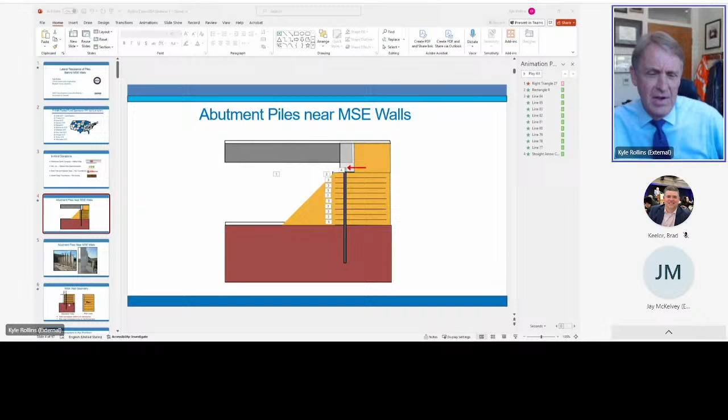Okay, Kyle, I got to cut in again. The slides are not going anywhere in our view. We're seeing the same one. We're all still on slide 4. Really?

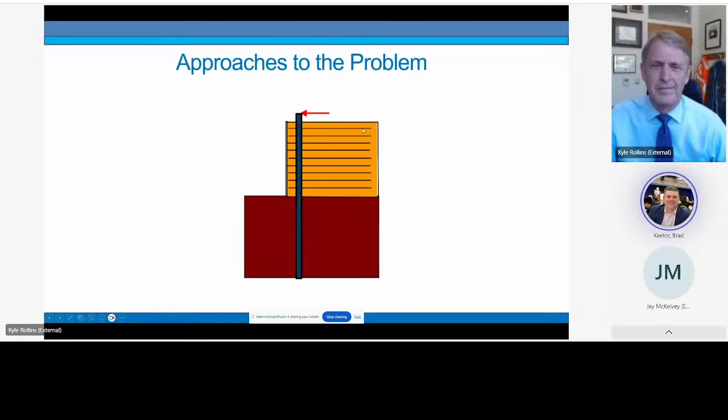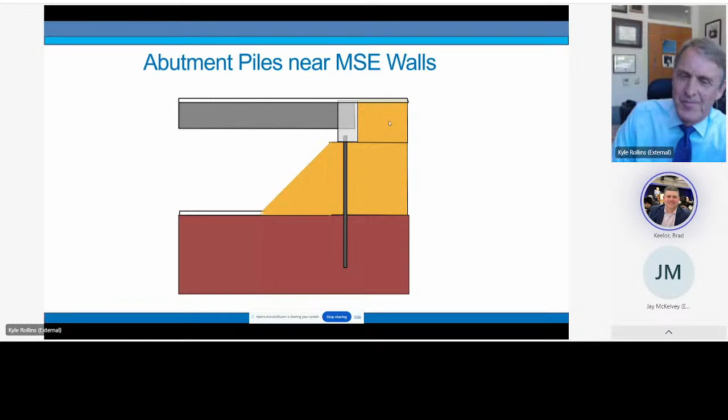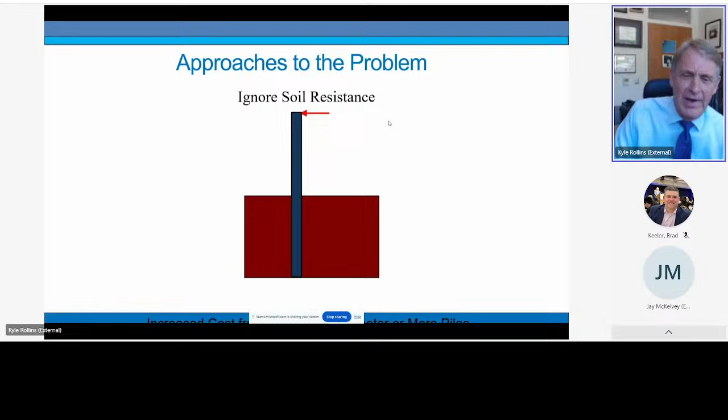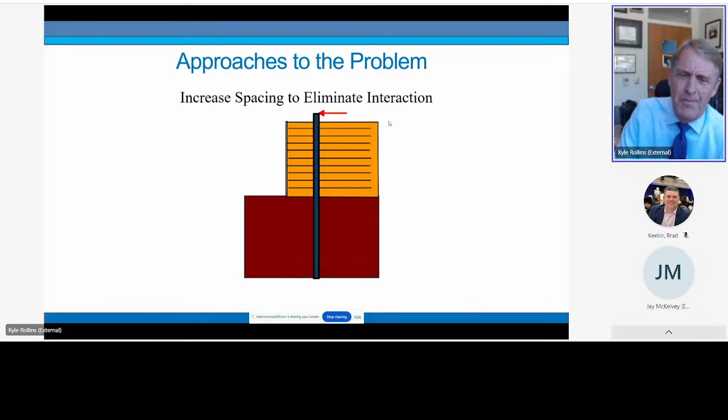So we're looking at how the wall would decrease the lateral resistance and how the pile load is going to increase force on the reinforcement. One approach is to ignore the resistance, which leads to more piles or larger diameter piles. Another approach is to move the pile further back from the wall face to reduce interaction with the wall, which leads to larger cost due to the increase in bridge span. And another approach would be to estimate a reduction factor, with the question being what should that reduction factor actually be?

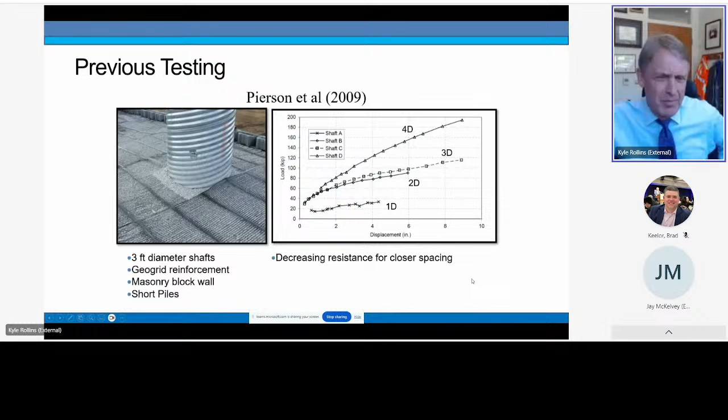That's anyone's guess, because there's been very little information to clue us in on that. Some of the best testing before we started our work was from Pierson et al., a study from University of Kansas. They involved a 3 ft diameter shaft with geogrid reinforcement, as you can see here, and a masonry block wall. The piles were short, so they had a tendency to rotate. But you can see the load versus deflection curve here, that as the spacing between the piles decreases, there's a significant decrease in the lateral resistance developed on the pile. That's going to be largely a bad thing.

If we look at the deflection from that study, we're going to be talking in our study about 3 inches of pile head deflection. That would lead, in this case, to nearly 2 inches of deflection of the wall, which probably wouldn't be a good thing in many cases.

So the objectives of our study were to measure the effect of pile shape and pile sleeves on lateral resistance - that's kind of a side benefit of what we're doing. Then we're going to try to measure the lateral pile resistance versus displacement curves for piles at different spacings behind the wall. We're using round, square, and H piles, and two types of reinforcement: ribbed strip and welded wire.

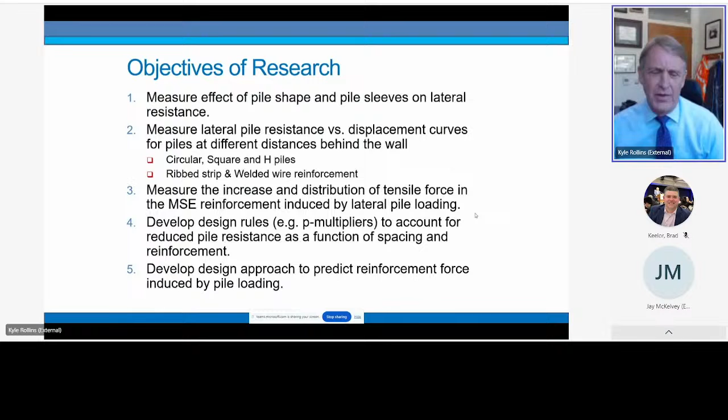We're going to measure the increase and distribution of tensile force in the MSE reinforcements induced by the lateral loading. Our next effort was to try to come up with P multipliers that could account for the reduced pile resistance as a function of spacing and reinforcement. Lastly, we wanted to develop pile design techniques to predict the reinforcement force that would be induced by the pile loading.

Our research philosophy has been: one good test is worth 1,000 expert opinions. Wernher von Braun, designer of the Saturn V rocket, made this quote. That's not because we don't value expert opinions - we do. In fact, we all want to be experts, that's why we're listening to presentations like this and going to conferences so we can learn the latest things. But what it does point out is we need to have enough full-scale tests so that we can understand how the world really works.

That's not always done. You may remember the Space Shuttle Columbia disaster. On launch, a styrofoam block fell off the external fuel tank and impacted the wing. Numerical analyses were performed by NASA engineers, and they said this impact wouldn't be a problem based on their studies.

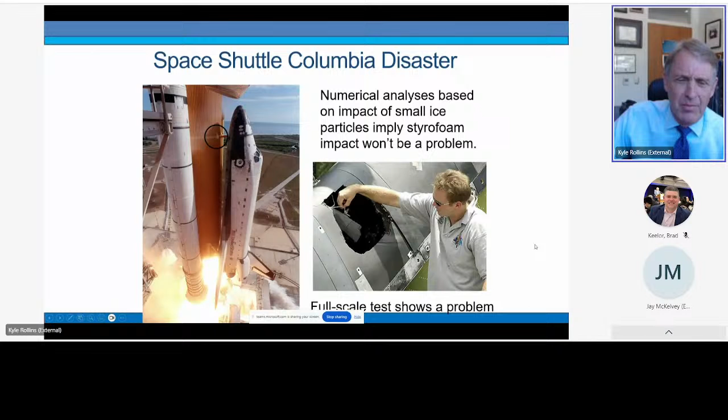But the Blue Ribbon panel that investigated this later said, yeah, we think it will be a problem, and we want to do a full-scale test. So when they fired that styrofoam block against the full-scale wing, you can see it blew a hole in the wing and blew a hole in their numerical modeling. So it's important to have large-scale tests to see how things work.

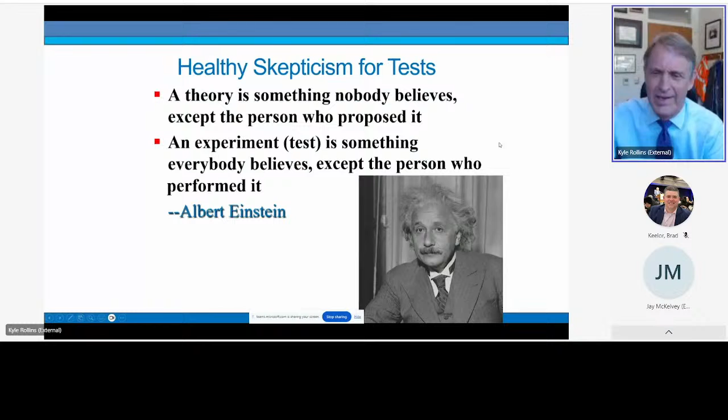But we have to have healthy skepticism for tests. They're not all of equal value. Einstein is reported to have said a theory is something nobody believes except the person who proposed it. He had a lot of experience with theories. An experiment or a test is something that everybody believes, except the person who performed it. Maybe you've had some tests like this yourself, where you're not sure if everything got compacted properly, or the strain gauges were working, or if the data acquisition had problems, or whatever.

So let's look for a minute at the effect of pile shape. In this study, since we were using round, square, H piles, and so forth, we wanted to take a look at what effect they are having. There are not very many cases where you can find what's happening at a comparison at a given site.

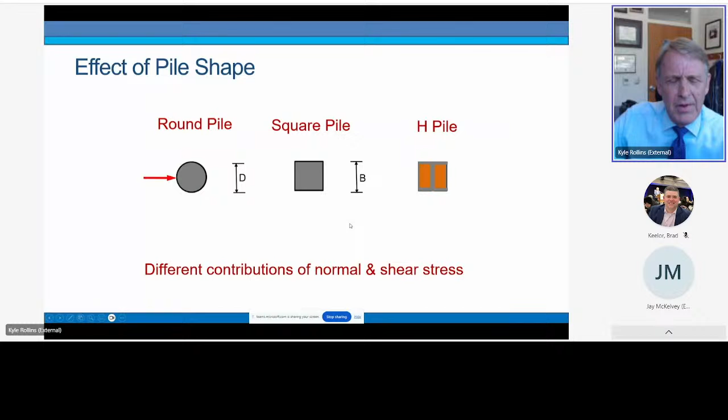So if we look at lateral loads on round piles, as they're pushed laterally in one direction, you can see that about half of the side is reduced in resistance. You're only in contact with the side of it. And then the passive force on the front is aimed concentrically to the middle. And so you have a lower horizontal force that's acting on the face.

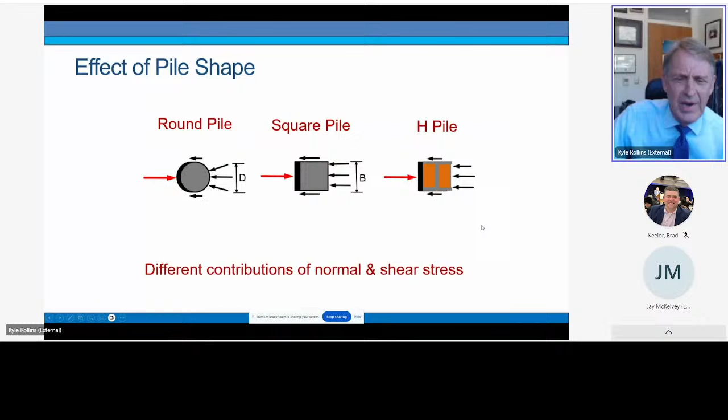If we look at the square pile in contrast, as it's loaded laterally, it maintains contact on the side, and all the passive force is directed laterally against the load. Similar resistance would be provided by this H pile as it moves in the weak axis. So because of these different combinations of normal and shear stresses, we might expect that a square or an H pile would give us greater lateral soil resistance than a round pile.

So what we did is use lateral load analysis using PY curve methods, where we're using nonlinear springs to represent the soil and a finite element model to represent the beam. And we used PY curves. In our case, these were sands, so we used the API models for PY curves.

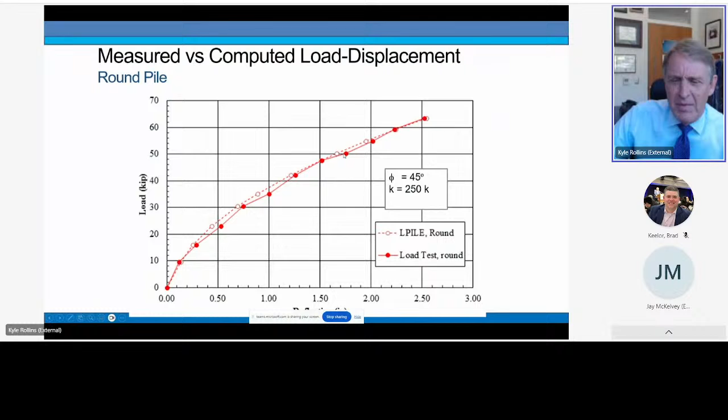We had to do a little playing around to get agreement, but in ours, we compacted this to 95% of the standard Proctor. And to get agreement, we needed a friction angle of 45 degrees and a K value of 250 pci. Now we're getting pretty good agreement here between the measured and computed round pile.

And when we use those same properties to predict the load on the square pile, you can see we're under-predicting, and it's even worse with this H pile. So something is wrong. We're getting more resistance than we expect.

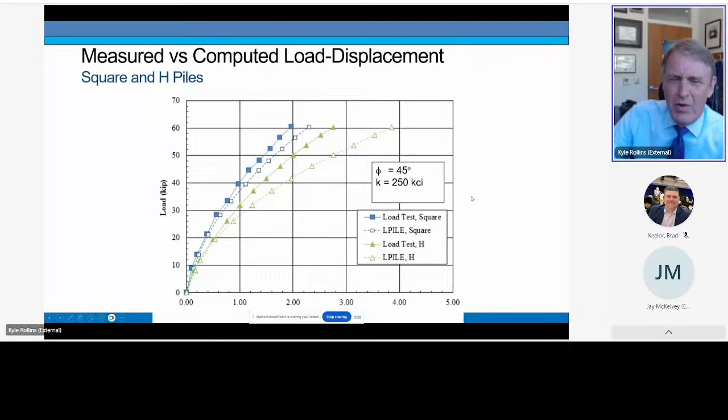So what we did is just multiply the resistance we get from the round pile to get us a resistance for the square pile. And when we do that with a P multiplier greater than 1, in this case 1.2, we get good agreement with the load test on the square pile, and good agreement with the load test on the H pile using a P multiplier of 1.2 here and 1.25 there. So what that's saying is we have a 20 to 25% increase in lateral resistance.

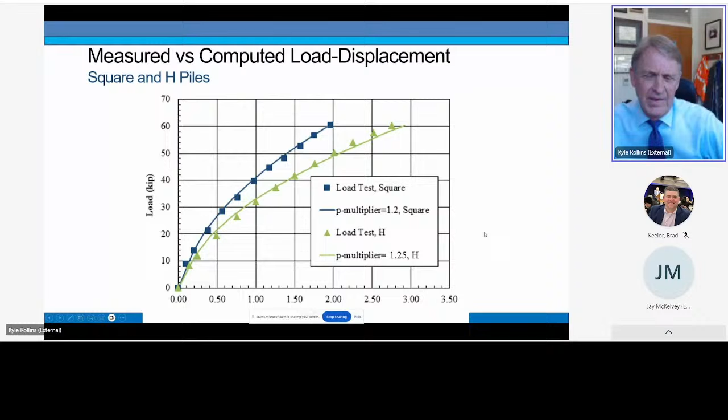Well, you don't want to base too much on one set of tests, so we added more soil and did this test over again. And here, to get agreement, we're seeing the same kind of thing, something like 1.2 to 1.25. So we're thinking then that you could expect maybe a 20% increase in lateral resistance for square and H piles relative to a round pile. And that's what we expected based on our initial thought about this.

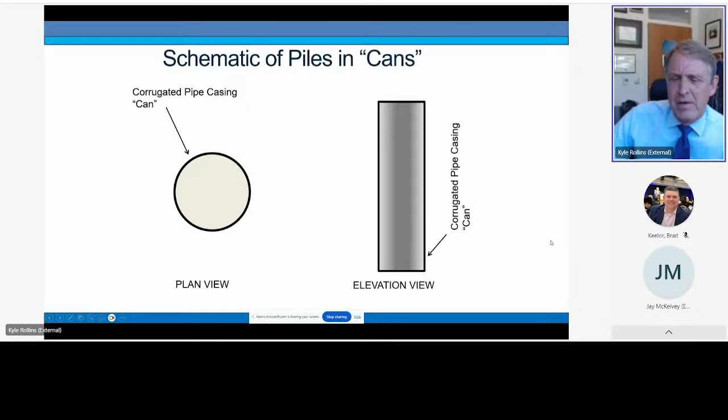Another type of pile you might sometimes see is a pile with a sleeve. The schematic of this is shown here. We have a corrugated sleeve, corrugated pipe casing - let's call it a can. In elevation view, it's placed down through the soil profile before the soil is compacted back up.

You can drop it in later on when it's more convenient. You could drive your steel pipe pile down through this, or concrete, whatever. And this is sometimes used to reduce the lateral resistance of the pile when you have an integral bridge abutment, and the load on the pile could cause distress.

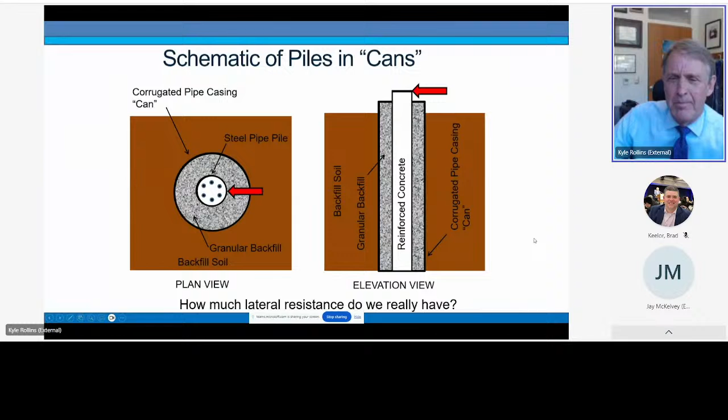Then what you could do is fill this up with concrete, and on the annular space between the pile and the surrounding corrugated pipe, you can fill it up just with loose soil that you dump into the ground. The question becomes, how much lateral resistance do we really have for this kind of pile? Many designers assume there's almost nothing, or very little for sure.

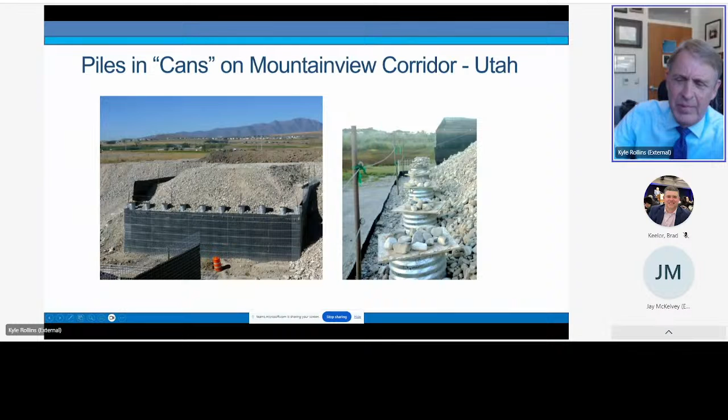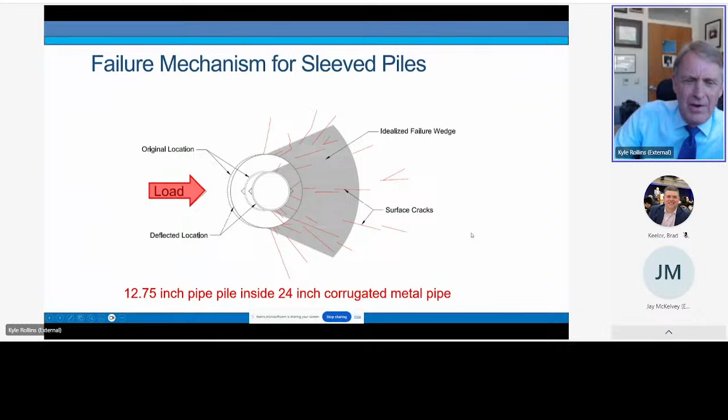So we took a look at this with a digital image correlation camera. You can see that with the 12-inch pile, we're seeing a failure wedge going out to maybe 3 to 4 feet. When we have the corrugated pipe that's 2 feet in diameter, now the wedge is extending out 6 to 8 feet.

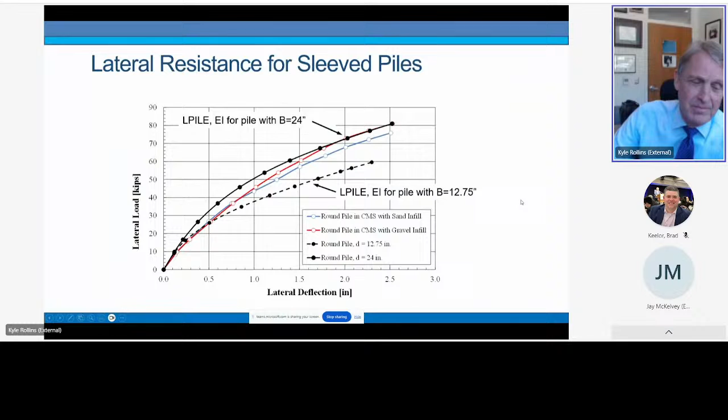So instead of having very little resistance, what we're seeing is that the resistance is quite substantial. One way to look at this is what we did is look at L-Pile. We're using the EI for the 12-inch pile, and we're only using the diameter or width of the pile - 12.75 inches out to, say, half an inch. Beyond that, we're mobilizing the full resistance of the soil acting on that 2-foot corrugated pile. In between, we can have a linear approximation.

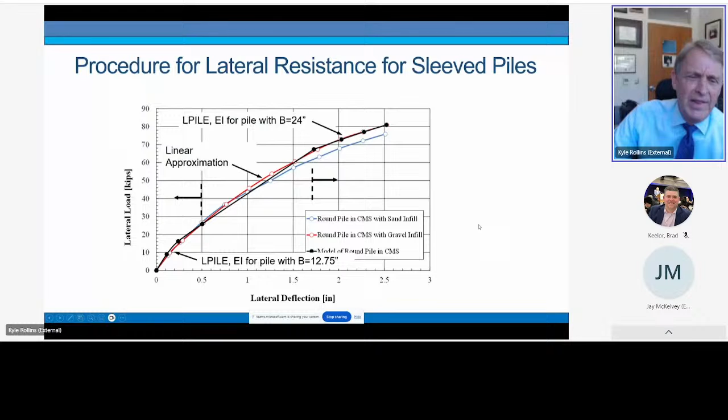Okay, let's get back on track talking about testing with piles behind MSE walls. Our first stab at this was to go to sites where they were building a bridge and do tests with different pile spacings. At this site on US Highway 89, we had one pile that was 3.8 diameters back from the wall face, and another was 7.5 pile diameters from the wall. Now, if I were trying to get 2 tests to line up, I'm not sure I could have done any better than I did here.

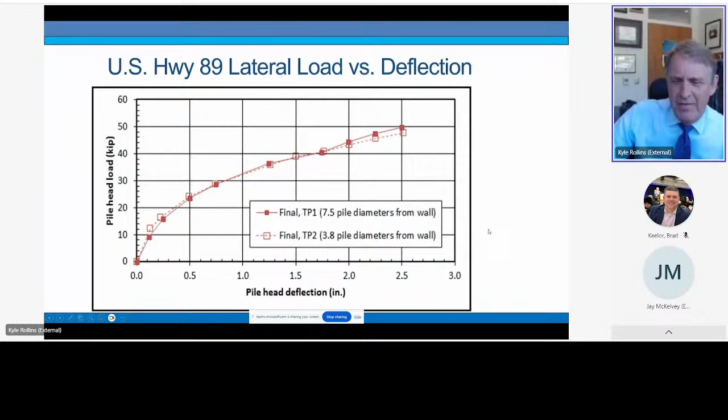But we were expecting there to be a reduction in lateral resistance, right? So you could say, well, maybe both piles are far enough behind the wall that there isn't any interaction with the pile. Or maybe what we're saying here is that the lateral resistance provided by MSE reinforcements was large enough to eliminate any reduction in resistance provided by the wall itself. So that would suggest that if we're maybe 4 diameters behind the wall, reinforced with rib strip reinforcements as in the case here, we would have adequate capacity.

Here's another set of test piles at Pioneer Crossing. These are at 5, 2.9, and 1.6 diameters behind the wall. And now you're seeing that as we place the pile closer to the wall, we have a reduction in lateral resistance like we were expecting.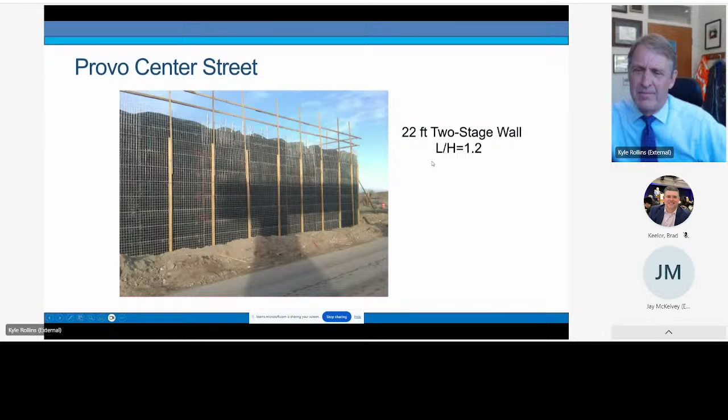This is another wall, a 2-stage wall. It's held up basically by this welded wire grid on the face. This is 22 feet high, with an L over H of 1.2. You can see now that we're seeing a substantial reduction going from 6.3 to 2.7 to 1.3. So placing the pile closer to the wall does create a significant reduction in lateral resistance here.

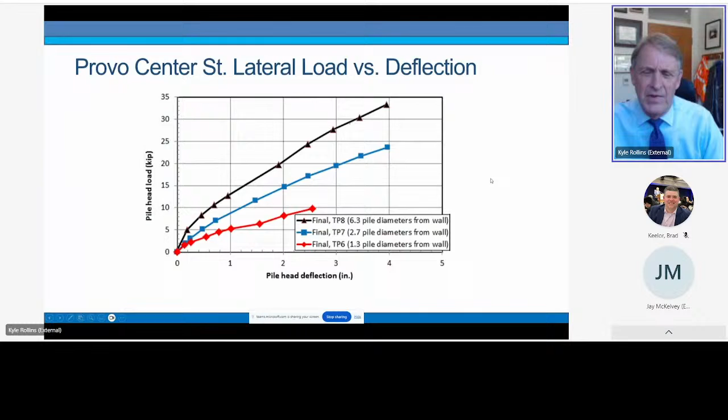But some of the problems of using existing bridge sites is you can't control all the properties and you have to take what you get. So my dream was to have a mechanically stabilized earth abutment like this, similar to a bridge, so we could see what's really going on and have enough time to do it. Construction jobs are very restricted.

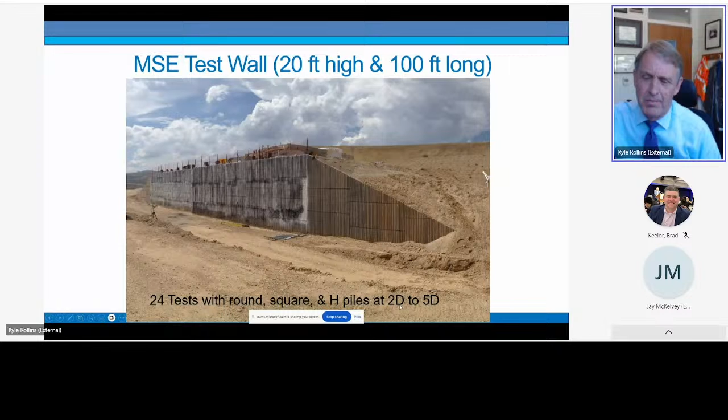So with these pooled fund studies, we were able to get enough money that we could build an MSE wall that was 20 feet high, very typical of overpasses in the US, and 100 feet long. We did 24 tests with round, square, and H piles with spacings behind the wall ranging from 2 pile diameters to 5 pile diameters. So this was a great opportunity for us.

Typically, the profile for an abutment at a bridge is shown here, where this would be the height, and this would be the length of the reinforcement. But we don't have any bridge in place here on our wall. So what we need to do is simulate the pressure produced by the approach fill with a surcharge loading. We've done that at the suggestion of Pete Anderson at Reinforced Earth Company.

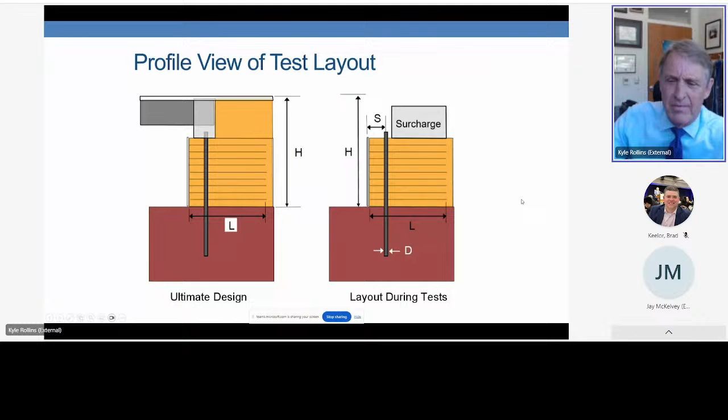It's a good suggestion. As we look down on our wall, we've got one side with piles for strip reinforcement, another side with welded wire reinforcement. We place surcharge behind the piles before a test takes place. Our piles extended 20 feet below the base of the wall, so they're acting as long piles.

If we look at a cross section, here's our surcharge pressure of 600 PSF to represent a surcharge from the approach fill. This is our test pile here. Our reinforcements extend 18 feet into the soil. We're loading this test pile against a reaction beam and reaction piles on the back face, so there's no effect of this reaction pile on the reinforcements themselves.

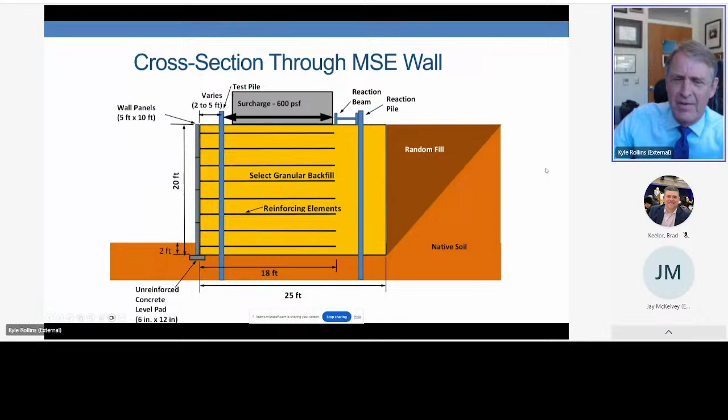The soil we're looking at is a silty sand with maybe about 15 to 20% gravel in the mixture, classified as SP-SM or SM, and we're compacting to 95% of the standard Proctor density.

So looking at our tests, we first built the wall 15 feet high. We did some tests on the reaction beams that I've shown you already early in the presentation. Then we did 4 tests on the strip reinforcement side, and here's the welded wire side. These were round piles at 2, 3, 4, and 5 diameter spacing.

We did a similar thing with the welded wire side on round piles. Then we did another set of tests with the H piles, loading on the weak side, which is what our state DOTs suggested that we do. Then we built the wall higher, up to 20 feet high. The L over H for this case is about 0.7.

Again, we loaded the piles laterally around the round piles. We've got maybe 5 or 6 feet of soil that's recompacted and virgin soil. Then we tested the square piles. So we have a total of 31 tests taking place at this test site.

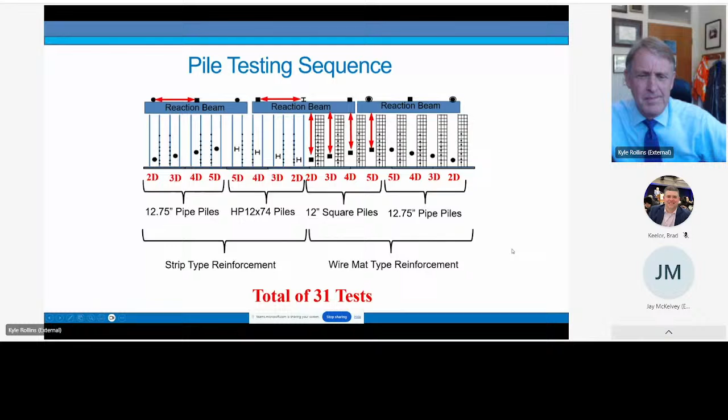Here you see the installation of the ribbed strip reinforcements, and here's the welded wire reinforcements. They're instrumented with strain gauges so we can monitor the tensile force that's developed in these reinforcements as the load is applied to the test piles.

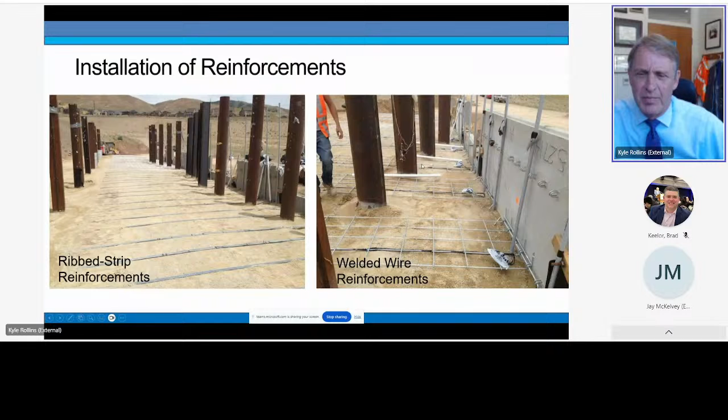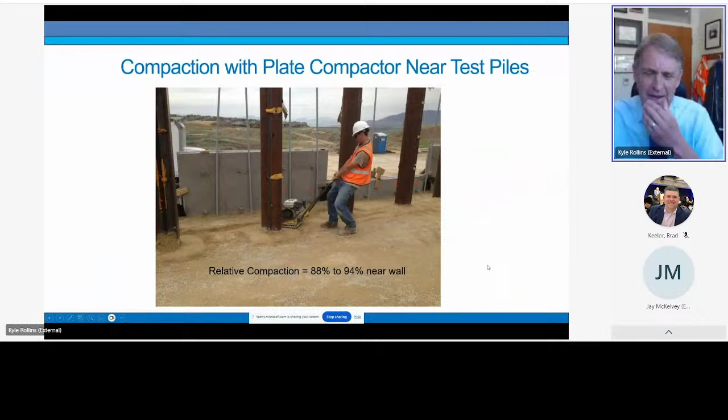Compacting away from the wall, we used a roller compactor, and it was easy to get 95% compaction relative to the standard. We used jumping jack compactors around the piles themselves. Up close to the wall face, within about 3 feet or so, we're compacting with plate compactors, so we typically get a little lower relative compaction, maybe 88 to 94% in this case. That's kind of typical of real performance, done so we don't cause the wall to bow out and be distressed.

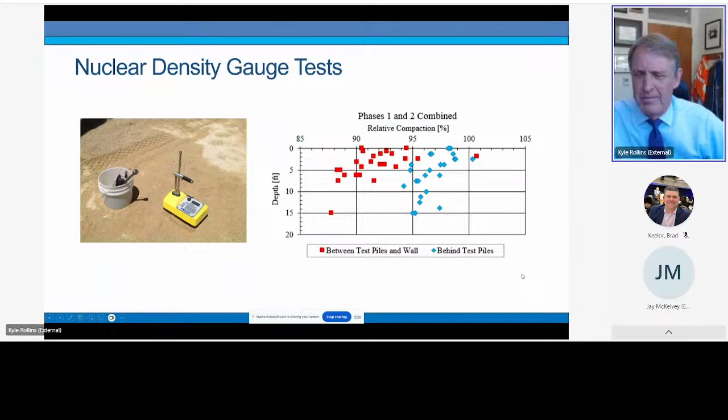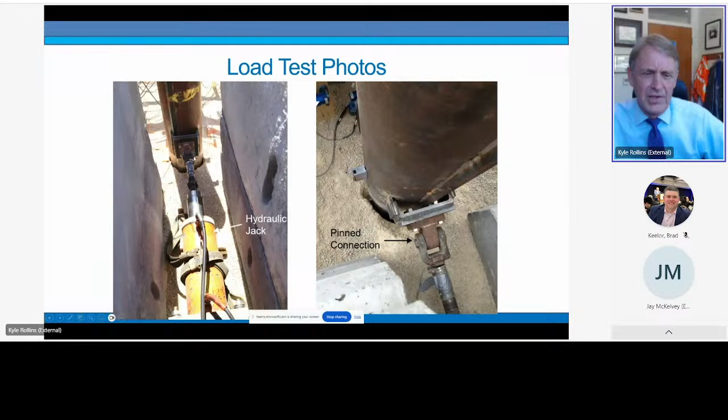Now, these are all maximum loads, maybe 40 to 60 kips in our test, at a wall displacement of 3 inches, or a pile head deflection of 3 inches. We had a digital image correlation setup so we could capture the movement of thousands of points on this wall, giving us color contours showing the displacement of the wall on either face, behind the test pile and in various locations around the wall itself. This is very helpful in understanding what's really going on.

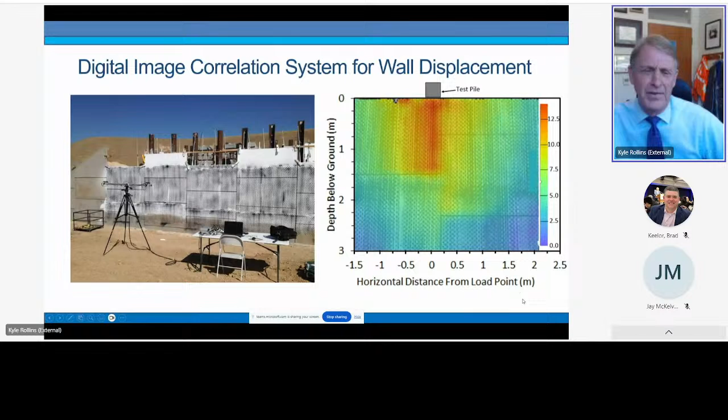This shows the maximum wall displacements that we measured with the DIC and string pots. For 1-inch pile deflection, we're seeing a maximum wall displacement of about 0.1 inch, so that's a fairly minor wall deflection. And if we look at 2 standard deviations, we might get 1/4 of an inch.

If we accept 3 inches of pile deflection, then for these 12-inch diameter piles, the average deflection goes up to about 0.3 inches. And these, again, are for loads of 40 to 60 kips. So even with our full load developed at 3 inches, we're having displacements at the wall face that are generally acceptable. These MSE walls were designed without any consideration of lateral loads from the piles themselves, so this is some of the excess capacity that we have that's controlling the displacements.

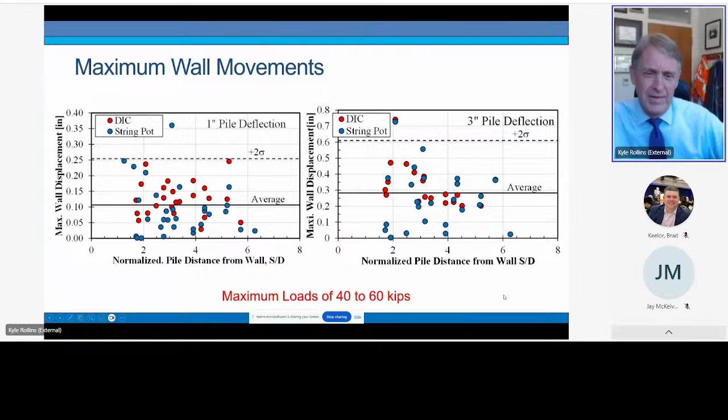So let's look at the reduction factors, these P multipliers that we need to account for this wall interaction. Once again, we're using PY curve analysis, with PY curves from API sand curves. So what we're going to do is look at the PY curves from a pile location away from the wall, and reduce that PY curve by a P multiplier we'll call P sub MSE to give us the PY curve near the wall.

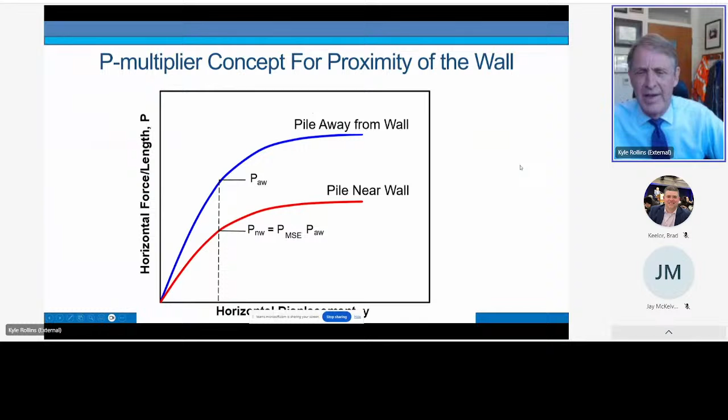Similar kinds of things have been done with group interaction and with piles in liquefied soil. So what we did first is calibrate our model with the pile furthest away, which was 5.2 diameters in this case. Once we got those parameters established - soil properties, friction angle, stiffness, and unit weights - we held those constant and didn't change any of them. The only thing we changed is the P multiplier, so that we got agreement with the other load tests at closer pile spacings.

So here this would be 0.95 for the 4.3 diameter spacing, 0.7 for the 3.4 diameter spacing, and 0.3 for the 1.8 diameter pile spacing.

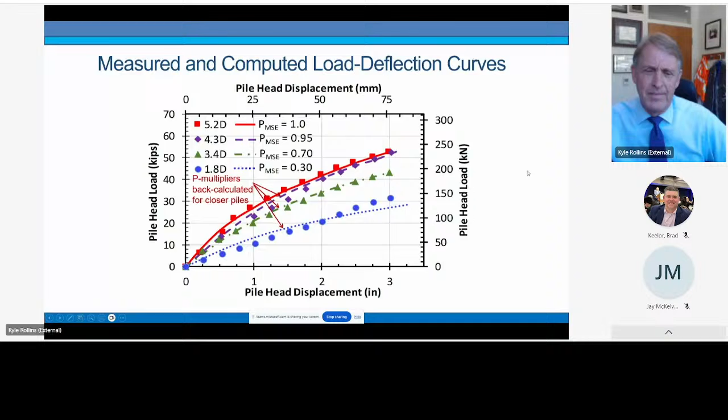This plot shows the back-calculated P multiplier values on the y-axis versus the normalized distance from the wall - that's the spacing behind the wall to the center of the pile, divided by the diameter of the pile. This is for welded wire reinforcements, rib strip reinforcements, and different L/H types.

If you look at the data, they show that if the spacing is greater than about 4 pile diameters, the P multiplier is 1 - say, no interaction effects. Or maybe it's better to say the restraint provided by the reinforcements is holding the wall in place well enough that you don't see any effect of the presence of the wall. Now, if we space things closer than 4 diameters, there's a significant reduction in the P multiplier, suggesting we've got less lateral resistance of the soil adjacent to the pile.

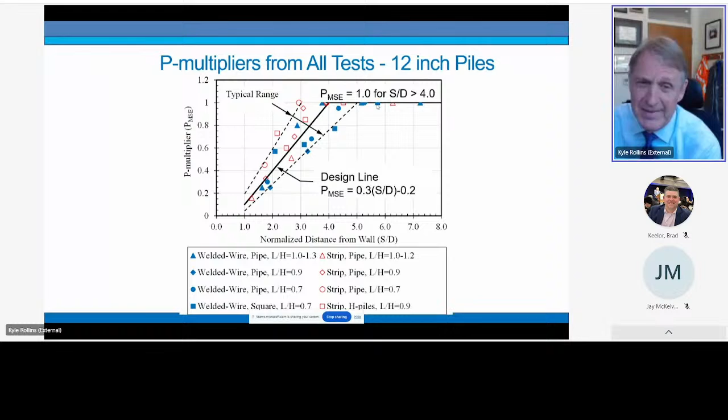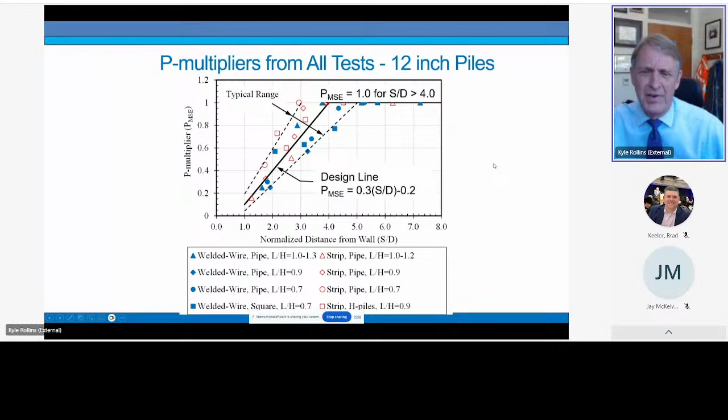And we can approximate this with a best fit line - a pretty simple equation. Now, with this kind of information, a designer can decide if it's better to put the pile closer to the wall, sacrificing some pile resistance but having a smaller bridge span, or put the piles further away, getting more pile resistance but a greater bridge span. So it gives the engineer some power to make decisions, knowing what's going on.

Next, we're going to look at induced force on the reinforcements. Think about this, this is really a complicated problem. You've got pile-soil interaction, you've got soil-reinforcement interaction going on. But we tried to isolate some of the key factors taking place here.

Another effect is if we move transversely away from the direction of loading, we're seeing a reduction in the force induced in the reinforcements. This one's closer to the pile, this one's further away at one level below the MSE. You can see that reduction here. This is at level 3 in the reinforcements in this case. This is closer to the pile, and this is further away. So as you move transverse away from the pile, you get less force in the reinforcements.

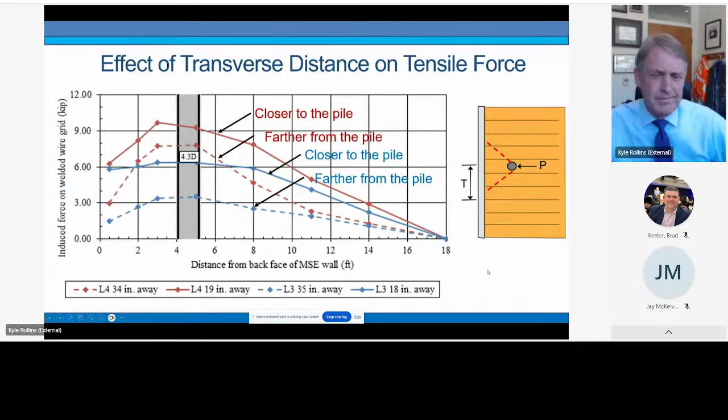So here's what we think is going on - a little schematic of the pile reinforcement interaction. Let's walk through this. As we're loading that abutment pile, this lateral force deflects the pile to the left towards the MSE wall face. And as the soil moves to the left relative to the reinforcement, it induces friction on the reinforcements acting in the direction of the wall. So what that does is increase the applied tensile force in the reinforcement. And it reaches its peak up here at the pile, if we're directly behind the pile.

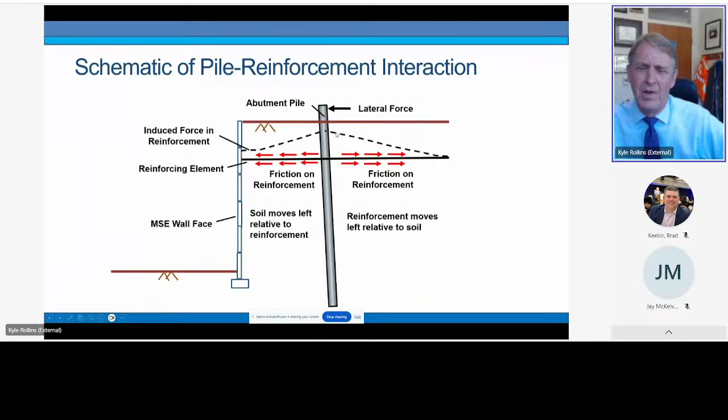Now on the other side, as the pile is loaded laterally, the reinforcement acting with the wall that's moving out - this reinforcement moves to the left relative to the soil, and it's trying to act as an anchor. So the friction on the reinforcement acts to the right to try and hold the reinforcement in place behind the wall. This produces a decrease in the tensile force, going back to zero at the end of the reinforcement. So we think that's the mechanism allowing us to have our peak force near the pile, and lower values at the wall face.

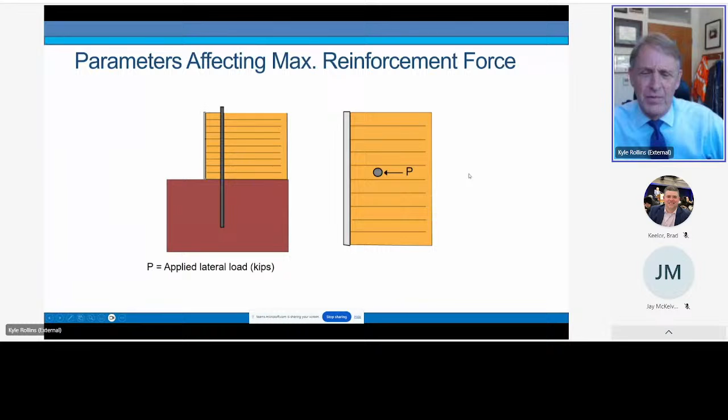So we're looking at this problem again and looking at some of the factors. We know that increases in the load increase the force in the reinforcements, and the transverse distance away decreases the force in the reinforcement. Statistically, we can also find out that if we look at the vertical pressure on the reinforcement, including the effect of the surcharge, it leads to an effect on greater resistance.

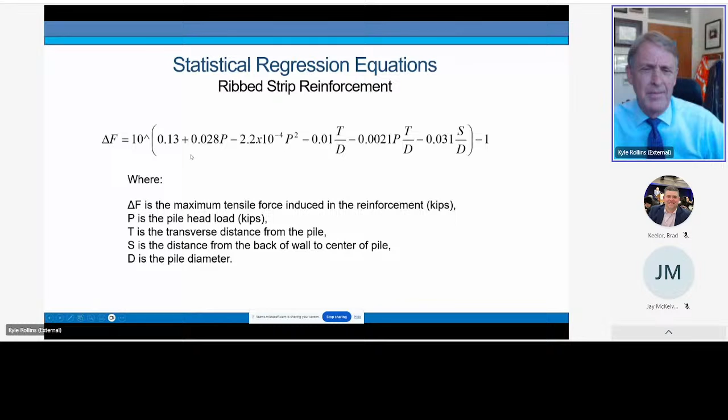So we're going to try and incorporate these. We tried to have a simple equation. We tried and tried, but we finally had to resort to statistical regression equations. This looks a little complicated, but it's only a function of 3 variables: the load on the pile, the normalized transverse distance from the wall or from the pile, and the spacing of the pile behind the reinforced earth, the MSE wall. Once you put that in your spreadsheet, you can let it go with no big problems.

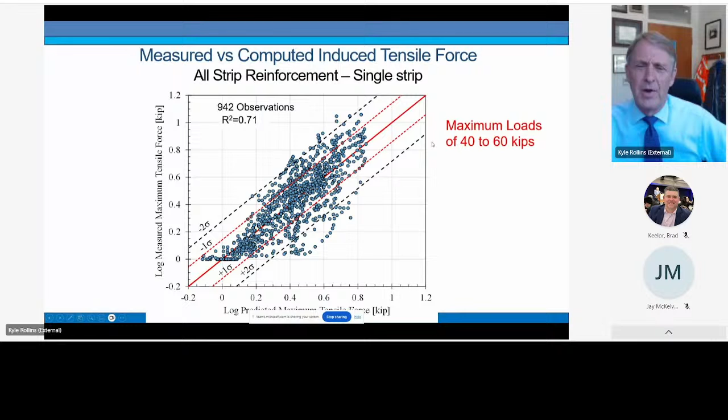If we go to all the welded wire reinforcements, it's again a function of the applied load on the pile, the vertical effective stress, and the transverse spacing relative to diameter. It seems like the reason this vertical stress becomes important is that the welded wire develops a lot of its resistance from passive force on the crossbars, transverse bars, and this vertical stress has an impact on that.

So once again, I'm showing you these measured versus computed tensile forces in the reinforcements. With over 1,000 observations, our R-squared value is about 0.72. So you think to yourself, can I live with that? If you're a geotechnical engineer, you probably can live with that, and if not, you may be in the wrong profession. I'm not sure, but a lot of our correlations aren't much better than that.

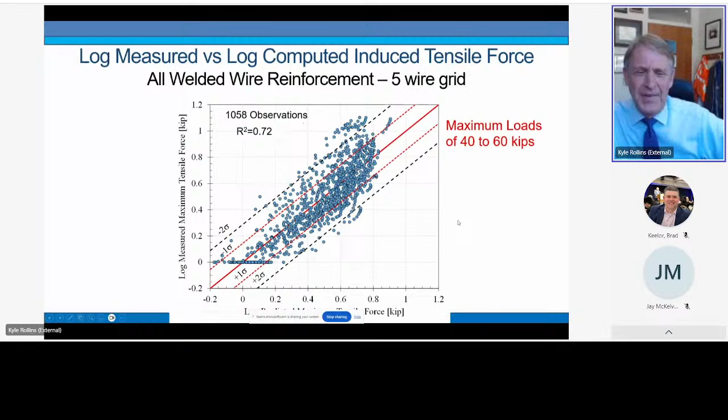So even if we're doing really consistent densities, trying to do our best, there's a big variation in the pull-out resistance, and that I think affects the force in the reinforcements near piles as well, because most of the resistance is coming near the surface. If we go deeper in the profile, there's less of an effect of dilation, and this is largely due, in my opinion, to the variation in dilation effects that increase the normal stress at these locations.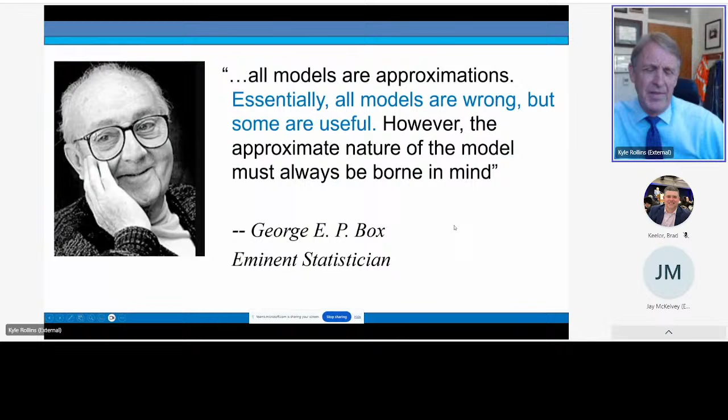Maybe some of you have heard this quote from George Box, who said all models are approximations: essentially, all models are wrong, but some are useful. So we're hoping that our model, even though we know it's clearly not correct all the time, can give us enough of an understanding of the variation we'll see in forces that we can make an estimate of the force that will be produced on the reinforcements.

I saw this quote—I've given you a bunch of quotes so far—and this is from Abraham Lincoln. I found this on the internet. It says, the trouble with quotes on the internet is that it's difficult to discern whether or not they are genuine. So be careful about the quotes on the internet you see.

So let's look at conclusions regarding piles near MSE walls. First off, we know that there's significant reductions in lateral resistance when piles are placed closer than about 4 diameters from the wall. This is applicable in our tests to 12-inch diameter piles with loads from 40 to 60 kips. If you use a larger diameter pile with higher loads, we have enough test results, which I haven't had time to show you today, that the displacement will be greater, but the P multipliers will be reasonable.

If we have piles placed closer than 4 diameters, we can account for the resistance by decreasing the P multiplier, P MSE, with a linear equation for smaller spacing.

We know that the maximum reinforcement force occurs near the pile location. It increases with applied load, it increases as the pile is placed closer to the wall, and it decreases with transverse distance from the pile. The statistical regression equations we've developed can account for about 70% of the variation. Other things like dilation effects and variability of the compaction effort likely account for the other effects.

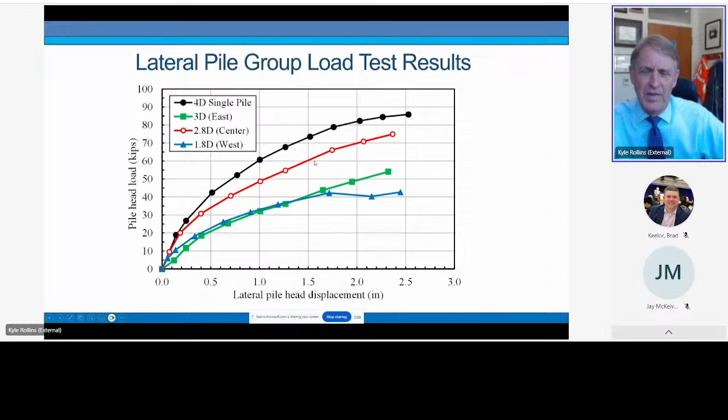This red one is the pile in the center. It has a lower resistance than the pile at 3 diameters or 4 diameter spacing. We expected that. And then the piles on the east and west side, the 2 outside piles, are giving us about the same resistance, but substantially lower than the pile in the center of the group. So looking back here, this is giving us the higher resistance, and these 2 on either side are giving lower resistance.

We normally expect this one to give us higher resistance than that one, because it's further back from the wall. But we think the reason why it's not is that we're seeing some interaction of the failure wedges between the 4D and the 3D test pile in this case.

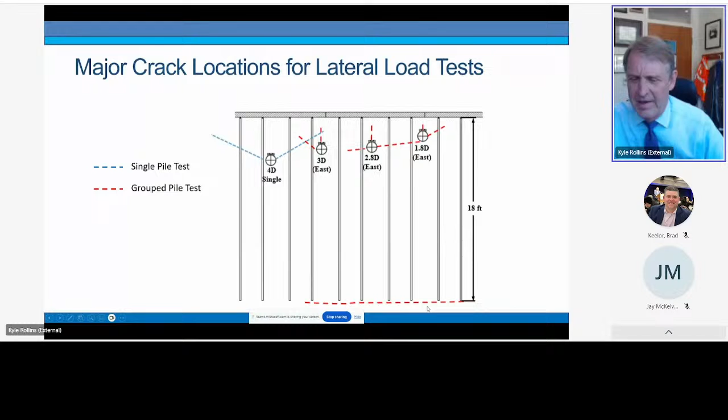So that's the single pile resistance. And then we want to account for any group interaction effects of the piles in a group along the abutment with this reduction factor. So when we do that, back calculate these P multipliers, the pile on the outside on the east has a value of 0.36. The pile in the middle is 0.94, and the pile on the right is 0.74. This is due to group interaction effects only.

So the average P multiplier for group effects would be 0.68. Now this looks a little suspect to us. It's really much lower than we'd ever expect. If the P multiplier for this group here was the same as it is on this other side, maybe trying to eliminate the effects of this pile out here, the P multiplier for group interaction would bump up to 0.8 from 0.68.

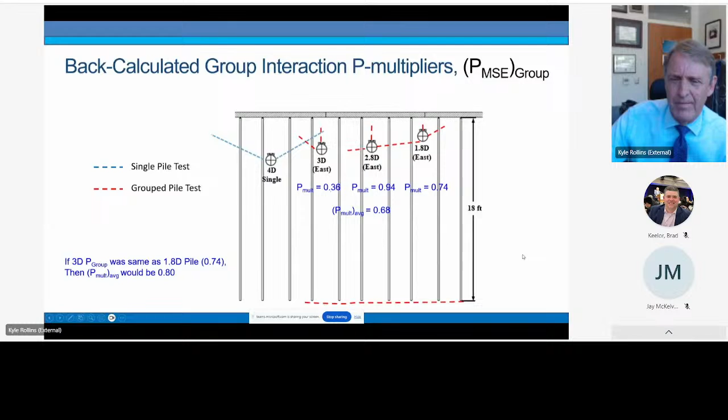What can we compare this to? There's one other study that the University of Kansas did, with Bob Parsons and his students working with Dan Brown and Associates. This is a 3-foot diameter round shaft with a cap at the top. These are 2 diameters behind the block wall, and these are going to be loaded as a group in this direction.

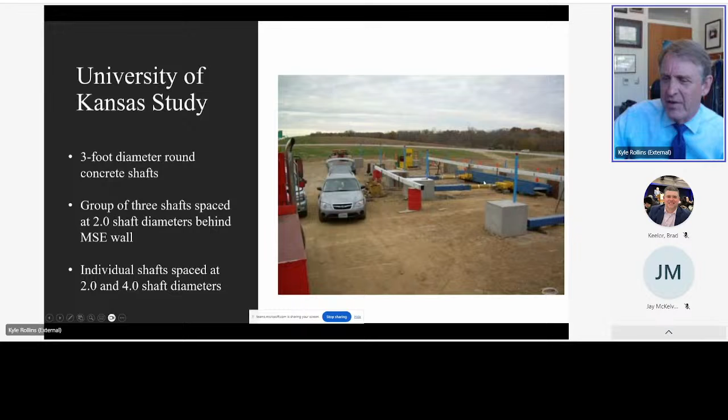So back calculating the group interaction effects from the test results that University of Kansas produced shows a P multiplier for group effects in the middle is 0.9, and on either side, on external sides of the pile group, 0.73, essentially the same on either side. That leads to an average group multiplier of 0.79.

Now, if we neglect the interaction effects in our test, we'd get something like 0.8. So really pretty good agreement if we neglect those effects.

Now, trying to apply these to a real project becomes a little difficult. In our case, we had 0.9 for the group interaction effect in the middle, 0.74 and 0.36 on this side, leading to an average group reduction factor of 0.68. Now, what do you do if you have a group of 5 piles or 7 or however many you might have in a row along the bridge abutment?

Well, one thing you could do is use these values at the external edges. But what do you do for the piles in the middle? Do you interpolate from here to here? Do you use the same value? If you use the same value as the other middle piles, then the P multiplier for the group would be 0.78, even if we use this lower value that we had before. And if we use the same value on either side, 0.74, say, similar to what Kansas got, and use this value of 0.94 for these interior piles, that would bump us up to 0.86.

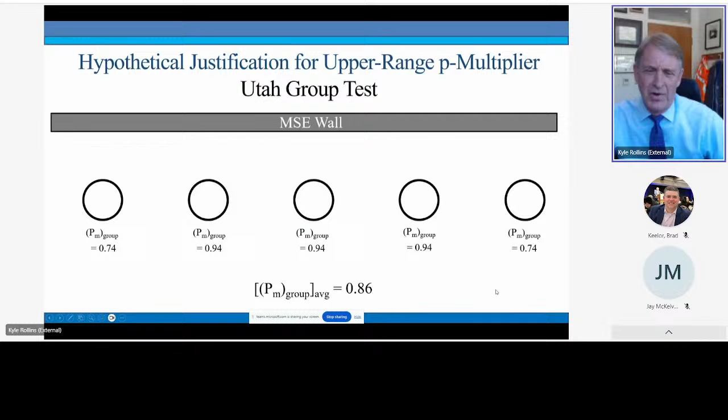So what we really need to know is what to do with these other interior piles to give us a little more information. So we're doing a project with our state DOT here in Utah, where we're going to go to a bridge site and have a deep beam to load 5 piles, trying to give us some additional information relative to the group interaction effects.

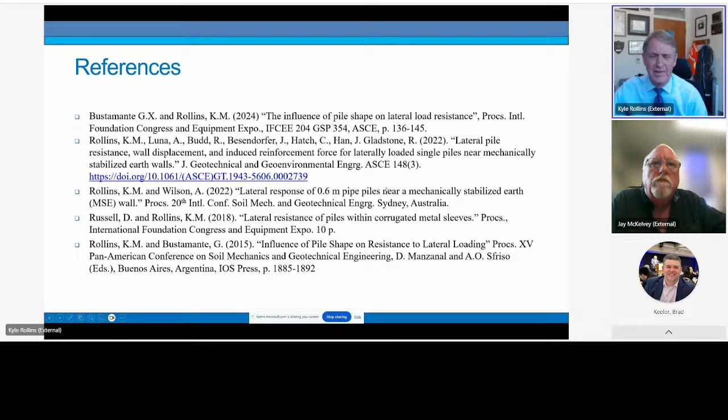Well, great. Thank you, Kyle, for a great presentation. I'll start off with a couple questions. Why were the H piles placed in the weak direction?

That's a really good question, Jay. It was a decision made by our technical advisory committee from those 11 DOTs, and we just had a slight majority that said we want to place them in the weak direction. Their thinking was that this would be more representative of what they do when they have an integral bridge abutment, where they're trying to reduce the stresses on the pile cap at the pile head. So that's what we did. You'd get a much higher resistance if you loaded it on the strong axis.

Okay. The loads on the reinforcement that you measured, if you were designing the wall, would you add those loads to the tensile reinforcements that the earth pressures would provide? Yeah, if you're designing the wall and wanted to be more explicit about it, you could take those forces, have the force produced by the various piles in different locations acting together on a reinforcement, and compute the force that it's going to take up. Of course, you wouldn't use any more than the total force you're going to apply, because it has to be transferred into the reinforcements in some way.